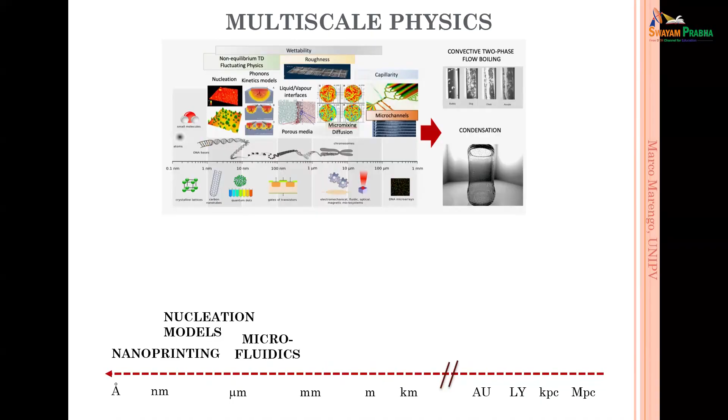Now I'm working with alginate droplets inside the system, as I showed you. Of course, I work with pool and flow boiling. Drop physics, this was my PhD thesis, about droplet impact. I work on icing phenomena, for example, to avoid icing on airplane wings using hydrophobic, super-hydrophobic surfaces.

I'm working on heat pipes, and here we are at the millimeter scale. And before that, microfluidics, between micrometers and millimeters, depending on the system.

But I also work a little bit on building physics, because there was a course in my faculty about building physics. Who is doing this course? Marengo, are you doing it? I don't know anything about buildings. Okay, you can do it. You must do it. Okay, I'll do it.

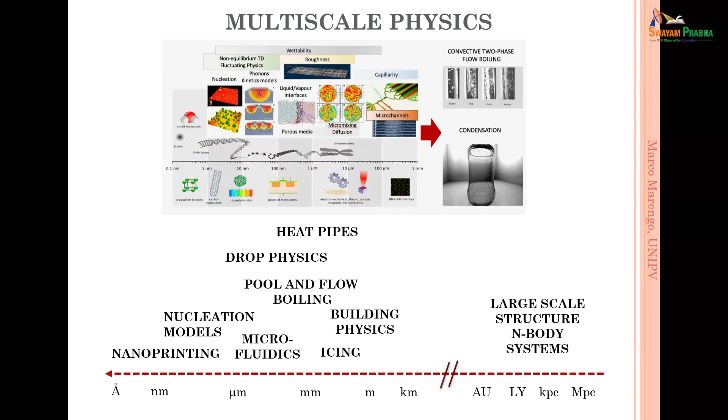And then this is my master's degree thesis, a very big multi-phase flow called the universe. In fact, my master's thesis was about the large-scale structure of the universe, where the particles were the galaxies. So this was my first multi-phase flow in my scientific career.

In fact, I am a cosmologist. So initially I'm a cosmologist, then I changed, but okay. Sometimes I'm asked to deliver a plenary lecture on my career, and I start this way, describing everything I've done over the years, covering really all the scales. This is really amusing.

But what is happening when we are going to do simulations? We need to think not only about length scales, but also about time scales, first of all. When we are dealing with molecular dynamics, we are speaking about from Angstroms to nanometers. With molecular dynamics, we can go up to 100 nanometers maybe, then it's becoming quite challenging in terms of computational time, and we are dealing with picoseconds.

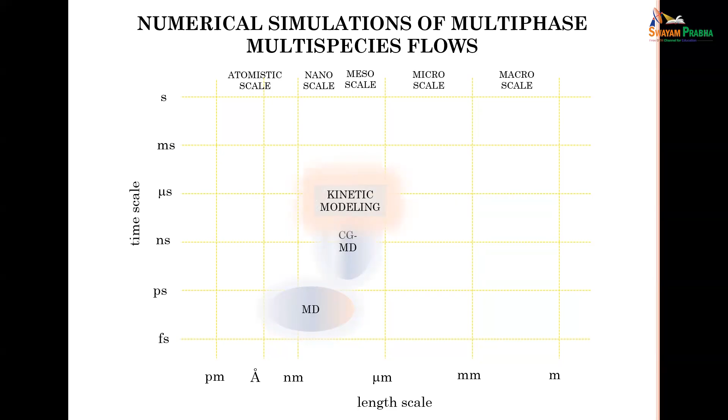Then we have coarse grain MD, where we try to put together a group of molecules. In this case we can go a little bit higher, maybe 200, 300 nanometers, something like that maximum, and we are speaking about nanoseconds. Then we have kinetic modeling, again the same scale, but the time is longer, about a little lower than microseconds.

Then we have the diffuse interface, stochastic hydrodynamics. We are going from nanometers, my simulation has 2 nanometers, 3 nanometers as a limit, up to, I was very optimistic here, let's say 1 micron, stretching the system and waiting a lot of time, then you may do it. And the time scale is about nanoseconds.

Then we have the phase field. Stochastic fluid mechanics is something inside the big realm of the phase field. The phase field is nothing else than solving the Navier-Stokes equation when we consider an interface that is diffused, so we have a finite dimension of the interface. In this case, with phase field, with different degrees of accuracy, we can go from nanometers to millimeters, so it's quite promising.

And then we have VOF, level set method, or hybrid methods that go from micrometer to millimeter. Just now, with PhD students, we are trying to understand the lower limit of VOF. So if instead of a nice droplet of 10 microns, 100 microns, or 1 millimeter, we go down to 0.1 microns, what happens? Is OpenFOAM with VOF able to solve this kind of problem? Which factors do we need to include?

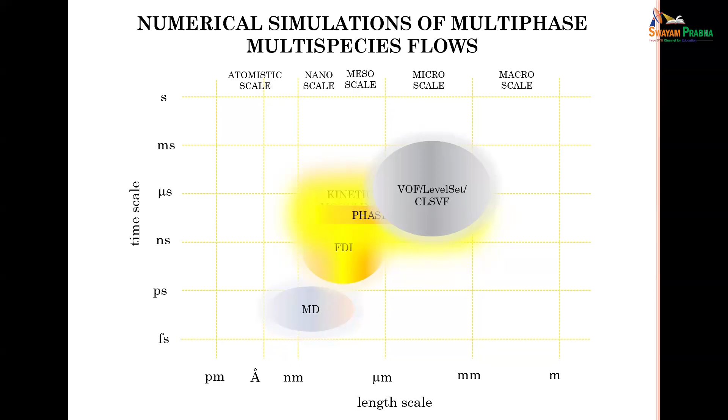For example, we saw that the problem of density is quite important. So if you're going below 1 micron and you're still using VOF with an incompressible code, you may have big problems, okay? This will be a next paper that I'm going to write with my colleagues.

Then we have lattice Boltzmann, a very versatile way to solve many problems at different scales. The main problem with lattice Boltzmann is, for example, that it is not reproducing the sound velocity.

Someone said that it was solved, but I'm not sure because I didn't find the paper where this problem was solved, honestly, so I need to check. And there are problems with the interfaces, the inaccuracy for some phenomena and so on. But it's, of course, very interesting. I'm not a specialist in lattice Boltzmann, I don't know anything, okay? So I don't want to enter because I never touch it. I know about it because I'm receiving papers as an editor, but it's not really what I do.

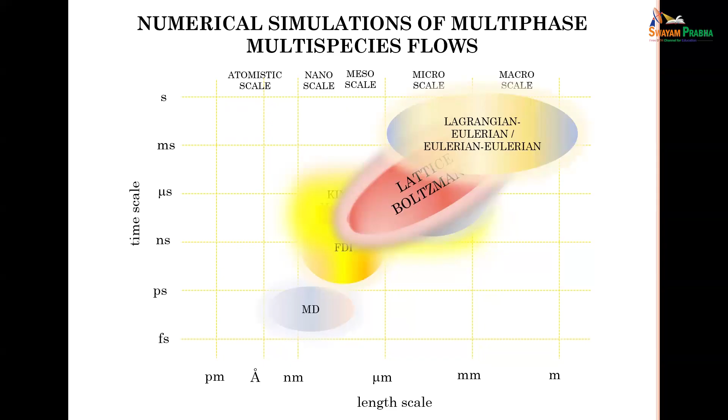And then there is a big point about the Lagrangian or Eulerian simulations that are going even further, even bigger simulations, for example for atmospheric conditions, so we are speaking about kilometers, not only meters. So in fact, what we have are different scales.

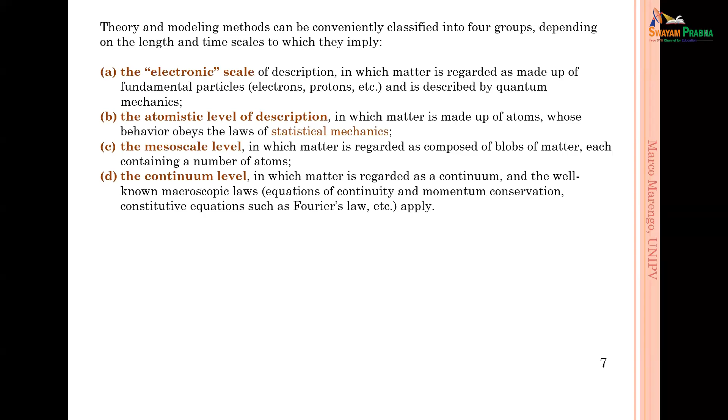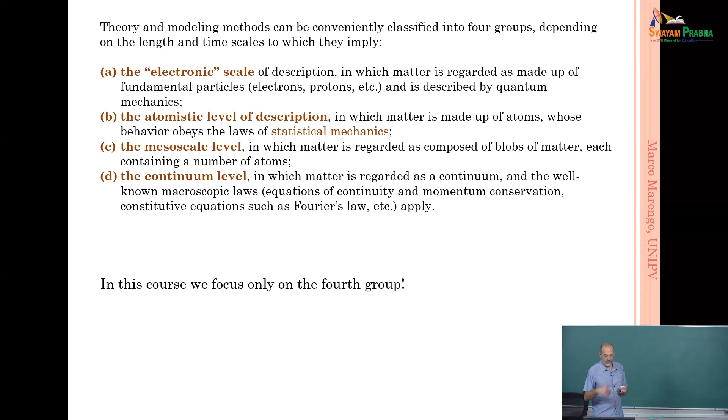One is the electronic scale, even quantum mechanics. Then we have the atomistic scale level to describe the phenomena, statistical mechanics. Then we have the mesoscale level, and finally the continuum level. In this course, we are going to speak only about the continuum level. So I'm not going to speak about mesoscale, statistical physics, or other things.

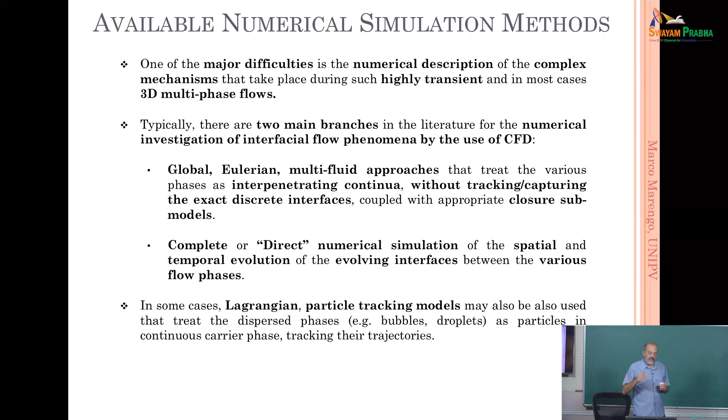The phenomena inside multiphase flows, as we understood after 4 days, are very, very complex. It's one of the most challenging phenomena that you may describe using CFD. So we can distinguish at least two big kinds. On one side there is a global Eulerian multiphase approach, it can be Eulerian-Lagrangian, but it's a way to treat multiphase flows.

The continua, so gas and liquid, gas and particle, are interpenetrating, so they are flowing there inside. And of course, what is important is that we are not tracking the form of the interface, for example the bubble and so on. For us these are particles, okay? We are going to see the equations later on.

But what is important in this case, if we have two components flowing, is the interaction between the two components. So what is very important are the closure equations to describe the coupling between one phase and the other. So it's becoming very tricky, the closure submodels, to know the closure submodels.

And then there is another way, the so-called direct numerical simulation, where we are really looking at the evolution of the interfaces. We are writing the equation in a way that makes it possible to track what is happening in time and space at these interfaces. The Eulerian approach can integrate the Lagrangian aspect, meaning the particles are simulated as a trajectory inside the continuous phase, for example when we have a dispersed phase.

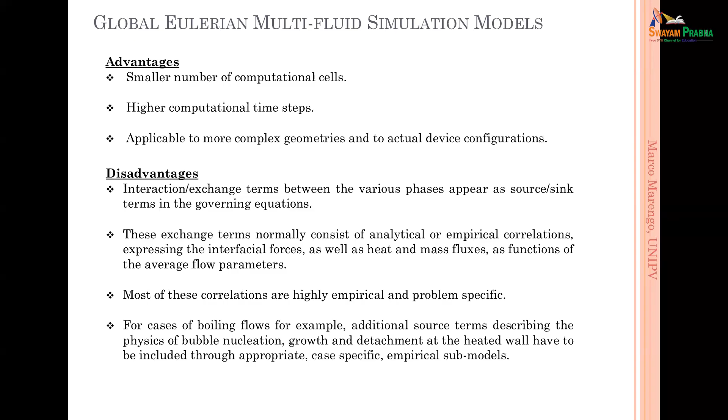About the Eulerian methods, we have advantages. We have a smaller number of computational cells. We have higher computational time steps, so it's easier, and this is very good when we have big scales, large scale industrial problems and so on.

Besides these advantages, it's a little bit difficult to write the interaction exchange terms, as you will see from the equations. It's not easy, sometimes it's very difficult to include all the physics inside. The second point is that you need to use maybe empirical correlations, for example for the interfacial forces, and usually we are dealing with average flow parameters, which becomes quite tricky when we have turbulent flows.

For example, when you have boiling flows, of course we are not looking at the bubble nucleation, we are not going to have a bubble rising because we are not tracking this. So for us it's something like producing the dispersed flow, bubbles, and tracking the bubbles inside the flow, like an interpenetrating continua, but we are not dealing with what is really happening in this way.

It's possible to have a good approximation, but we rely on closure semi-empirical or even empirical equations, for example for H. We are coming back to the convection coefficient, so we don't know what is happening exactly, but we treat the boiling by giving a given value for the transfer coefficient, which considers everything inside. But then we need to rely on empirical correlations for H in the boiling conditions.

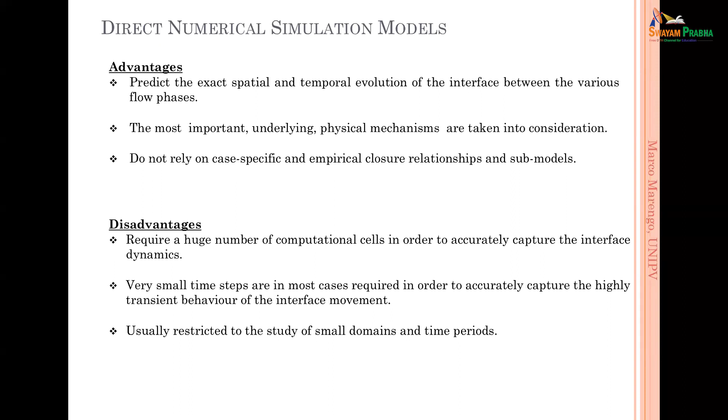However, in most direct numerical simulations, at a given point, for multiphase flows, we need tuning parameters. For example, for boiling with the VOF method, the only thing we can do is say we have a surface, but we are not able to solve the roughness of the surface. The roughness is a scale beyond what we can resolve. So what we can do is patch initial vapor seeds on the surface, and from those seeds we get the boiling. But we cannot simulate how many bubbles we have on the surface and so on. Once we have the bubble seeds, we can simulate the growth of the bubbles, but we still rely on not knowing what happens before that.

This was one of the major reasons why I started to study statistical physics and doing mesoscale simulations.

One big disadvantage is the huge computational power you need, especially if you want to resolve the problem in a very accurate way.

One issue I see as an editor of journals is that many times papers come to me with simulations, for example of boiling, using 50 or 100 micron mesh cells. It doesn't work. But they say, I did a mesh sensitivity analysis and it didn't change. Yes, because it didn't change since you are still very far off.

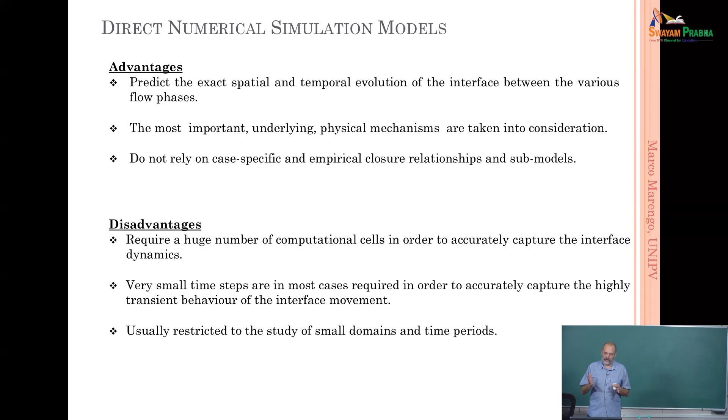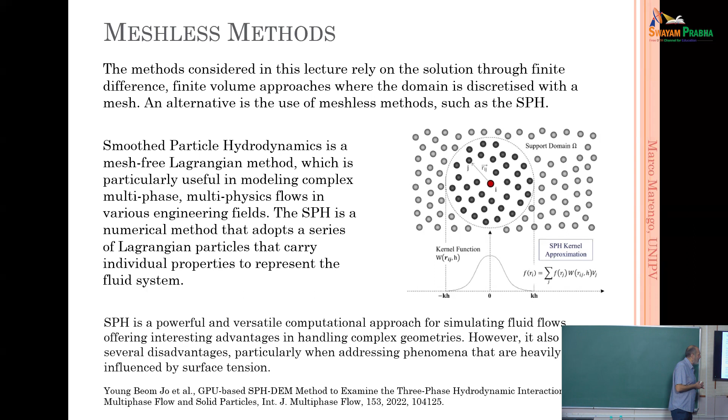It depends. We also have meshless methods, for example SPH, the smoothed particle hydrodynamics, which is in fact a mesh-free Lagrangian method. It's interesting because it can include a lot of physics inside it, so it's quite powerful. There are problems, for example, related to surface tension.

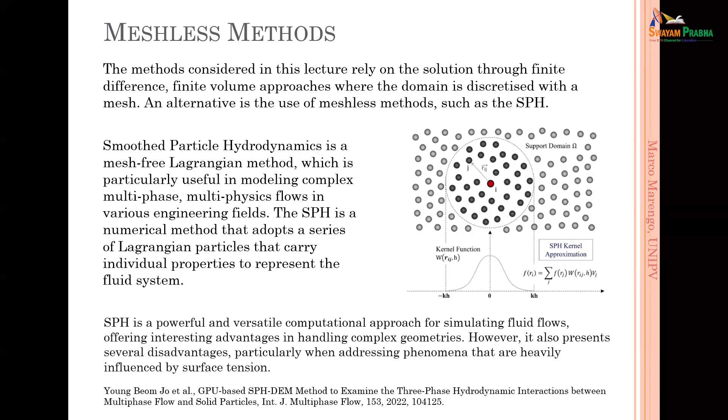But for example, if you have problems like the breaking of a dam, the classical problem of water, a wave, a big wave, this is not too bad. It's also possible to work with SPH. I'm not going to say more about that.

In the last few years, SPH became very interesting because of the GPUs. The way equations are treated in SPH can be really interesting for GPU use, which can accelerate the simulations. It's becoming now interesting. Before, it was okay, interesting, but up to a given point surface tension wasn't there, other phenomena weren't included. Now it's becoming more interesting because with the GPU it's not too bad.

Especially if we have many different components: particles of liquid, solid particles, particles related to gas, particles related to another liquid, for example. Then it becomes interesting, and now with the GPU it's becoming even more interesting.

Again, as I said, there is a problem with surface tension. A colleague of mine is working on that. We have errors, spurious currents, so the interfaces are not well described and so on. But someone is working on it. I think one of the strongest groups is in Munich, Germany. They're working on that, and they are doing something also with surface tension now.

Gas-solid flows: as I said, there is a Eulerian-Eulerian approach and a Eulerian-Lagrangian approach. In the Eulerian approach, both phases are considered as a flow with Eulerian treatment, so we have equations for the liquid, for the gas, and an equation treating the solid particles as a continuum flow, which is possible when we have, for example, a lot of particles.

We have the Eulerian Lagrangian approach, and here we have at least four different kinds of solutions. One is the discrete phase model, DPM, which tracks the particles. Particle-particle interactions are ignored, but the interaction between the continuum phase and the particles is there.

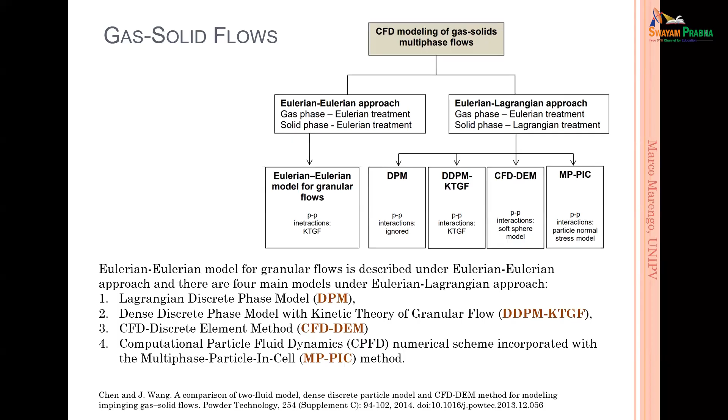Then we may have a dense discrete phase model where we also include particle-particle interaction, so we have collisions of particles, and we can consider hard spheres or soft spheres. So we can have different cases, and we can put elastic and inelastic collisions in the simulation.

We have the so-called discrete element method, DEM, with a soft sphere in this case. It's interesting because we may have heat generation due to the collision. So we have a soft sphere, and we can calculate how much heat is due to the interaction, which is not possible with other methods.

And then we have the multiphase particle in cells, MPPIC, where we are considering in a very accurate way also the viscous interaction. So all these methods are differentiated by how they treat the particle-particle interactions.

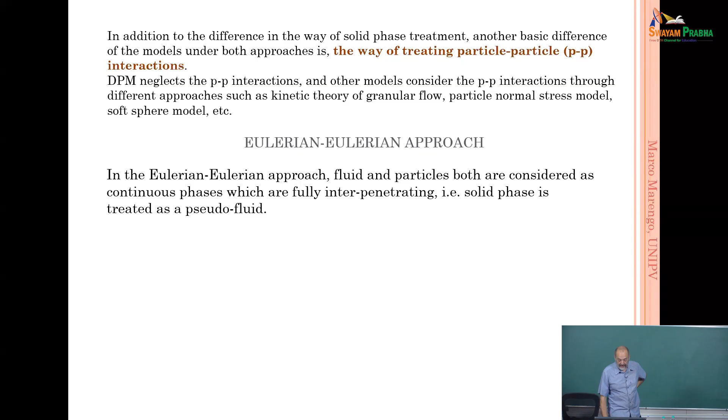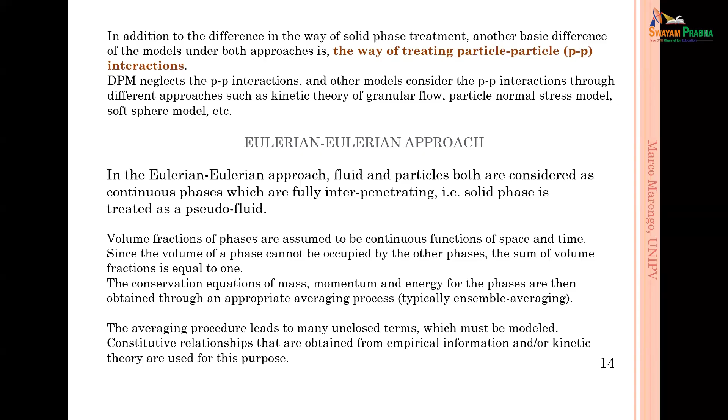So let's start with the Eulerian approach. As I said, in the Eulerian approach the fluid and particles are both considered continuous phases. Here we are using the concept from when I spoke about multiphase flows, number one. So we are speaking about volume fractions, and tracking the values of the volume fraction is really the key point.

So we know how much is the volume fraction of particles inside the total volume, and these values are changing in time and space during the simulation. Of course, the sum of the volume fractions must be 1, as we have already seen. And we need to write the conservation equation.

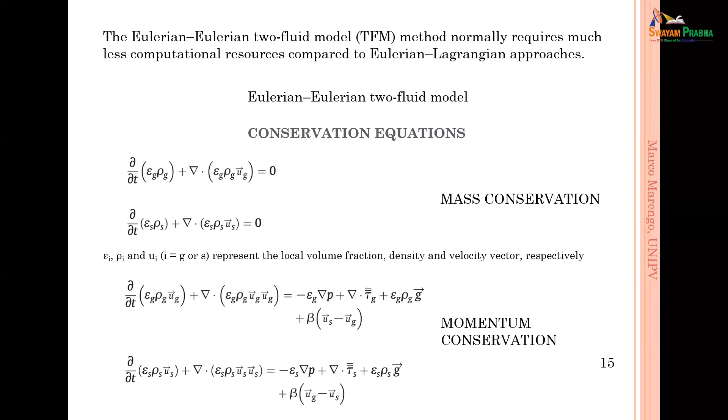For example, these are for the Euler two-fluid model. We have the conservation equations, and you can see they are completely separated, as I said. You can recognize what we have demonstrated in lesson 2.1 about the modeling of the Navier-Stokes equations, the conservation methods.

And we can write this term here. This is the mass conservation, and this is the momentum conservation. Momentum conservation is quite classical, however classical only until a given point, because, for example, we have this beta times US minus UG term.

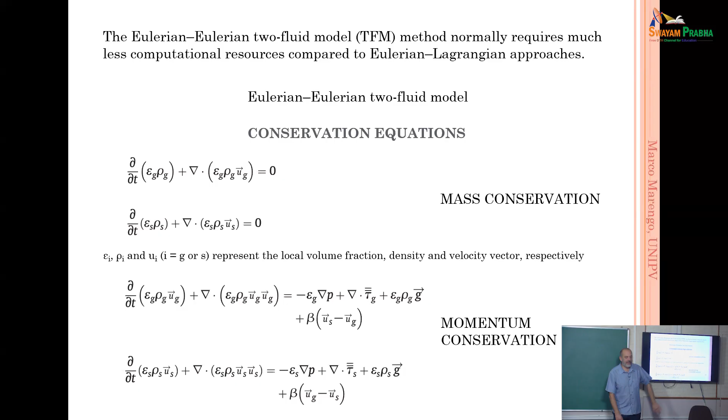So this is becoming not completely separated, because we don't have the subscript G all over - there is now a connection between particles and the liquid or the gas. The same here: the two equations apparently are the classical Navier-Stokes equations, but now we have another term that is already a first link between the two phases.

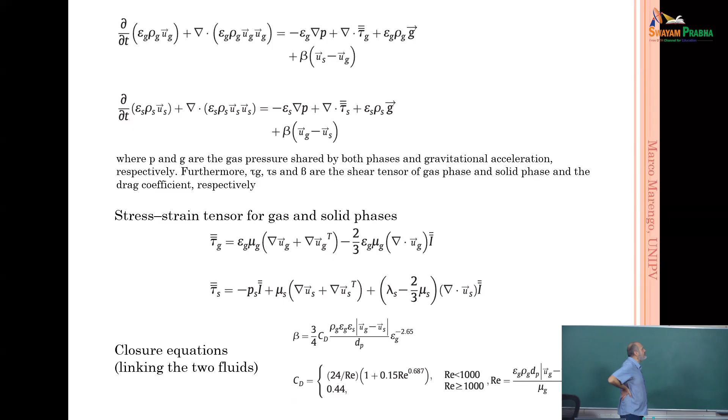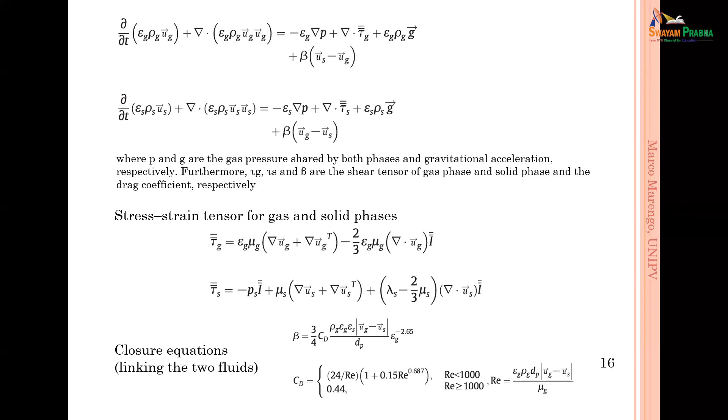So one of the points is that tau G and tau S can be written again in this way, and the problem is this beta - sorry, this is the closure equation for the beta. The closure equation means the link between the solid particles and the fluid, the continuum phase, and it can be written in this way. It's linked to the drag coefficient of the solid particles that are going to be dragged away, or dragged with the flow.

And these are the terms that we have for the gas and for the solid, and we can admit the fact that we may even have a compressible situation. This is interesting - look, the compressible term is in the solid.

This is interesting to point out, because imagine having a fluidized bed with a lot of solid particles, and we are considering the solid as a fluid. Well, it's really possible that the density is changing - we have agglomeration, and agglomeration for the solid means a change in the density. So it seems strange to say, but the fluid, gas and liquid, is incompressible, while the solid is compressible, which is a little bit weird.

What, the solid? No - the fluid is incompressible, no problem, we can deal with this. The solid is compressible because we have agglomeration - the particles can stick together, so in a given volume you have more particles, and so you are changing the density.

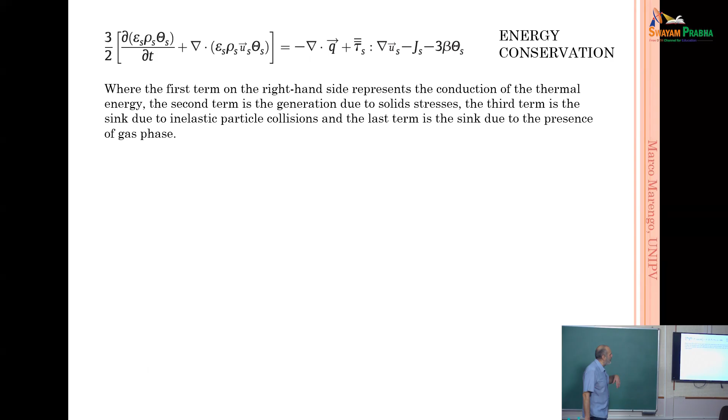And then we have the energy conservation equation, and this is also for the solid part, so we can have something similar also for the other one.

Another point that we need to simulate is the pressure of the particles. We said that it's a flow, imagine having all these solid particles. If continuous, then there is a pressure associated to the continuous, like the fluid, like water, liquid water or gas. So we can write the pressure in different ways, but this is a possible way. It's linked to the temperature, for example. So we can construct an equation that is saying how much the pressure of the solid is linked to the temperature of the system.

We can even write the viscosity of the solid. This is one way, because here we are entering the research domain. So we can have different kinds of equations in order to describe what is happening for the different particles. For example, if the particles are solid spheres, it's something, but someone might add, oh, it's not spherical, it's a polymeric, ellipsoidal particle. Then you need to change a little bit. So we are entering research, and there are really very sophisticated models for the different cases. There's even the thermal conductivity of the solid flow. So you need to write expressions, and this is again only an example. I took an example from a paper, how to write pressure, viscosity, and thermal conductivity of the particles.

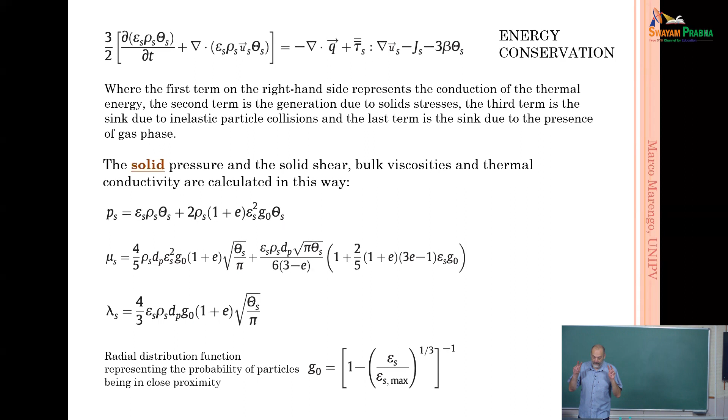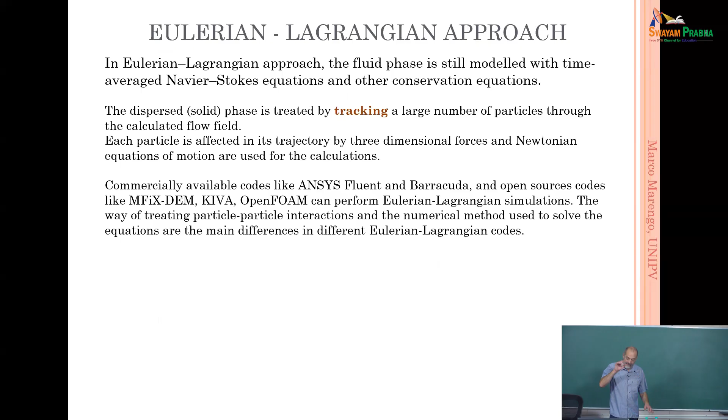Then we have the Lagrangian approach. We have a lot of commercially available codes, in ANSYS, OpenFOAM, and so on. What is important here is that we are going to have continuum flow plus the disperse flow, which we track using Newton's laws of mechanics. So we're going to have equations linking the mass of the particle, acceleration of the particle, d2x/dt2, equal to the sum of forces acting on the particles. In this case the particles go around, and the trajectory of the particles is inside the simulation.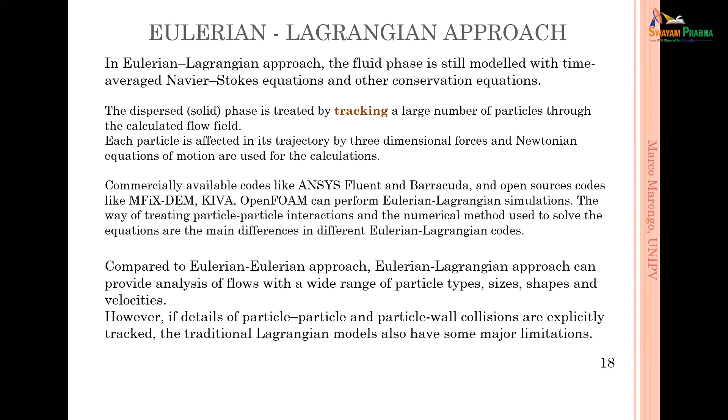What is interesting is that with this kind of solution, it's not too bad if we have something other than a sphere, because the other approach relies on writing the right equation for the thermal conductivity, viscosity, pressure, which is a mess. Here we have a particle that is going around. It's not too bad, for example, even if there is a different shape, this is okay. It's not a problem at all in this sense.

We can even have angular momentum of the particles. We can include it, because it's a question of balance of forces. So we can have also the conservation of angular momentum of the particles. So we can have cylinders, particles as cylinders that are rotating in space. It's possible. And for example, for a spray, we can use this kind of simulation, because the spray is producing a disperse phase, a lot of drops going away.

One of the problems, of course, is that a Eulerian-Lagrangian simulation can be really overwhelming if we have a lot of particles, because we are following each particle, so it's becoming really crazy. So what can we do? We can have a coarse-grained Eulerian-Lagrangian simulation. What does it mean? Instead of following each particle, which can be overwhelming, we build up parcels. Parcels are groups of particles together.

So, for example, in the case of a spray, we can put together particles with a given dimension, because the spray produces a distribution of droplets. We can group them together in small packets and see what's happening. This is interesting, because even if we have a lot of particles, we can follow not the particles but the parcels. Someone calls them digital particles, because they are digital representations. They're not actual particles, it's a set of particles.

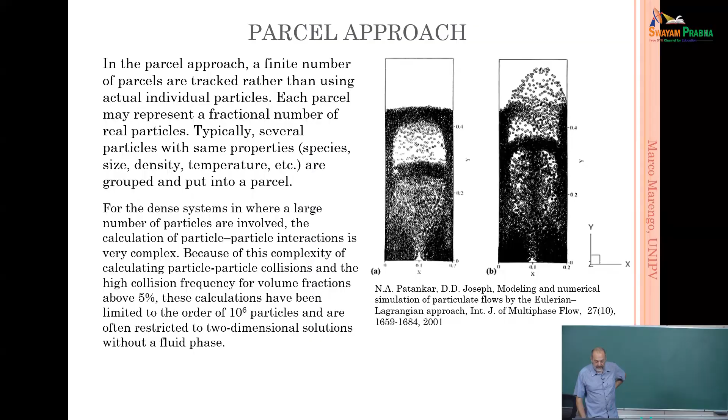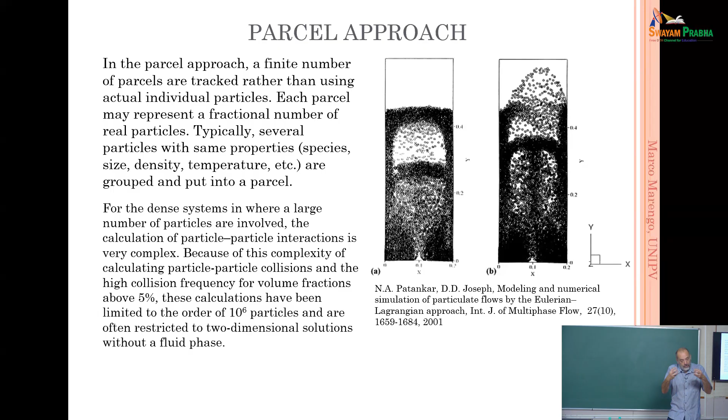One of the problems, of course, is the collision models. For example, in this case with parcels, same for sprays, a parcel of droplets is going along and another parcel of droplets is coming, and we get a new parcel, or maybe two parcels, but with different properties because of coalescence of droplets or breakup of droplets. So the parcel itself can change due to collisions. This is, of course, a problem because again we need closure models to understand how to deal with the variation of properties inside the parcels.

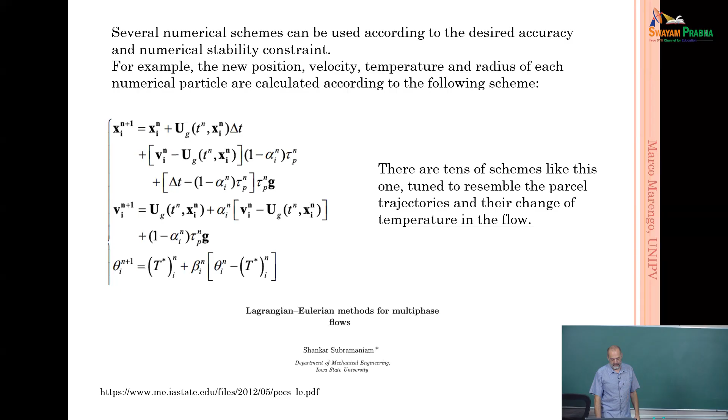How is it possible to write the equations? Well, it's too long to cover here, but we write the classical equation where we have the position of the particle linked to the velocity of the fluid and the forces acting on the particle. I'm not entering into detail, there is a lot of literature on that.

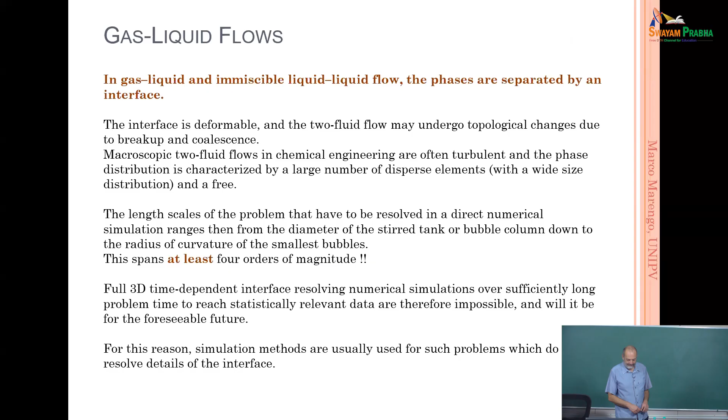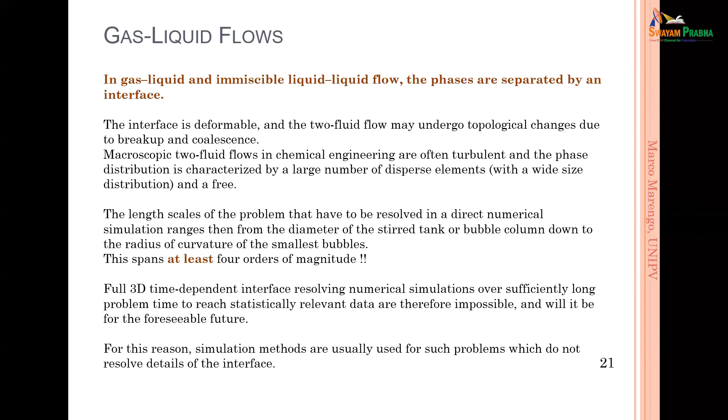Then gas-liquid flow. This is very complex because we have surface tension. Every time we have a liquid, we may have the problem of surface tension. If we have a pipe full of oil flowing, there's no problem with surface tension, and a flat surface is also not a problem. However, every time we have the presence of something else, like gas, we have a free interface somewhere - a bubble, wavy film, and so on - surface tension plays a role and we need to consider it. We can't say we can neglect it.

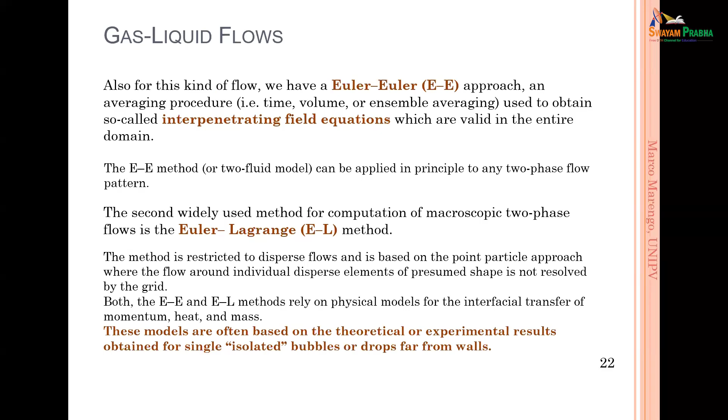Also for gas-liquid flow, we may have Euler-Euler and Euler-Lagrangian simulations. Again, the point is that we need the right closure models. Another point is that solving the problem of gas-liquid flows is quite complex because there are a lot of possible scales.

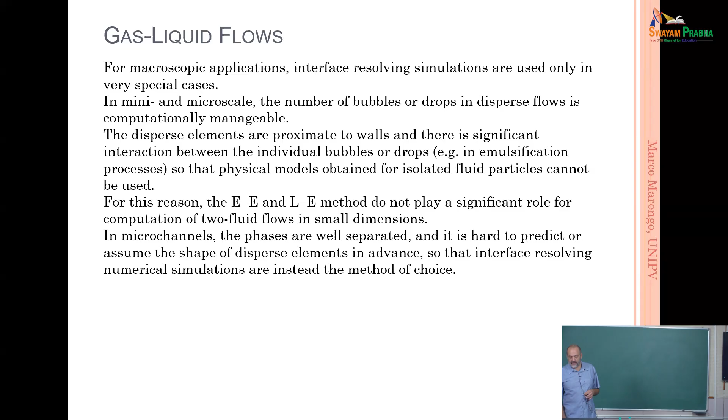In small dimensions, we can go for direct numerical simulation. In big dimensions, for example heat exchangers, we need to rely on Euler and Euler-Lagrangian methods, otherwise it's too big. But for example, in microchannels, the phases are very well separated, so we can work on that and do the simulations. At the end, I like this picture from a paper by Martin Wörner.

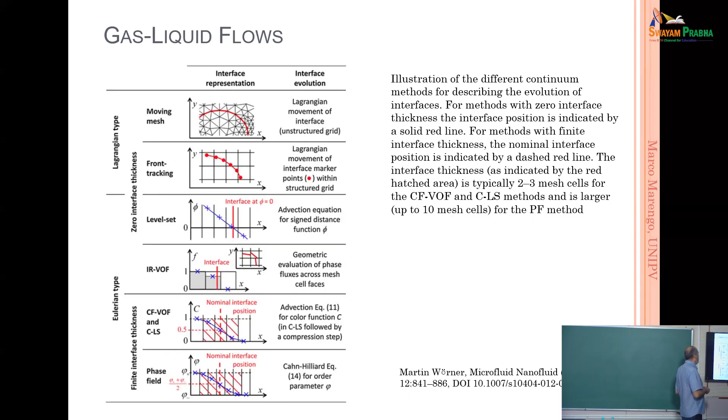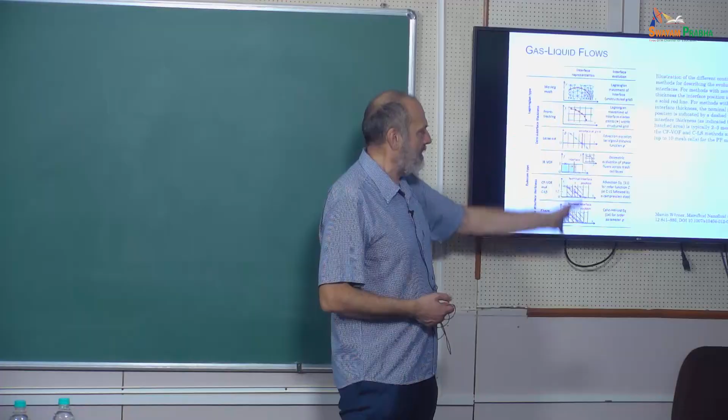We have the Lagrangian type and the Eulerian type. What's important in this case is to understand how to deal with the interface. The interface is the devil - the way we deal with the interface becomes the key point. So there are different ways.

First of all, we have two big distinctions. One is about zero interface thickness, so the interface has no thickness - it's really like a mathematical interface. The other is when we accept the fact that we have a finite dimension of the interface, for example in phase field methods.

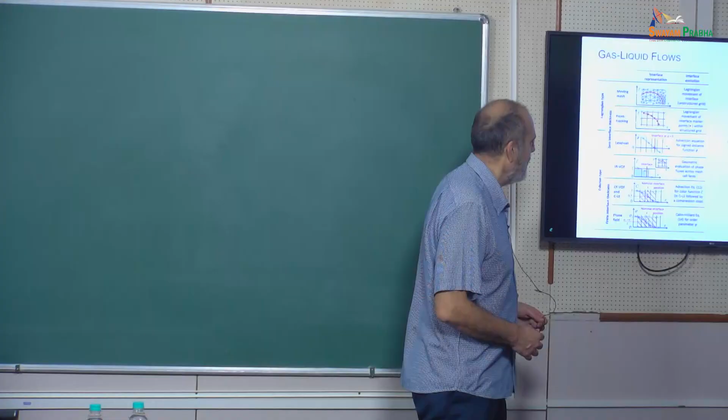Or there are different forms of VOF, for example, if you allow VOF to have a given interface thickness, we can play with this, especially if we have VOF simulation very close to the critical point - this can be a problem - or we're dealing with VOF with compressible codes. In this case, we need to understand how thick the interface is. Otherwise, with zero interface thickness, we have different ways to explore the simulations.

This is the moving mesh, where we move the mesh with the interface. We have front tracking, level set methods, and VOF, where we have a very sharp interface.

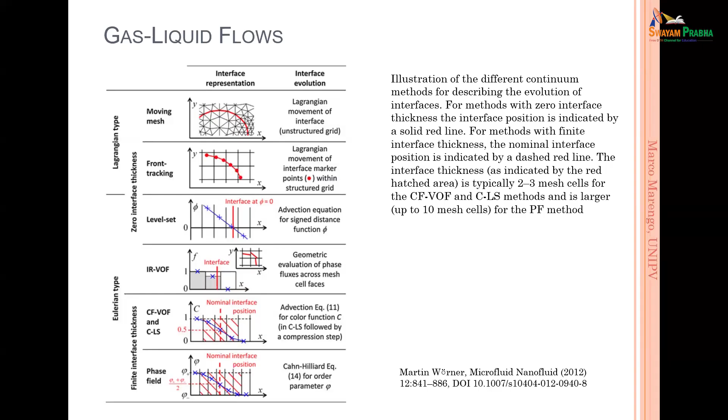Of course, all these situations may have problems, for example with VOF. If we are doing a very sharp interface, we may run into the problem of losing mass - it's a very classical problem in VOF. So we need to tune things and have the right shape of the interface in order to avoid problems like that. Nowadays, we are really able to have a very good VOF, and also level set.

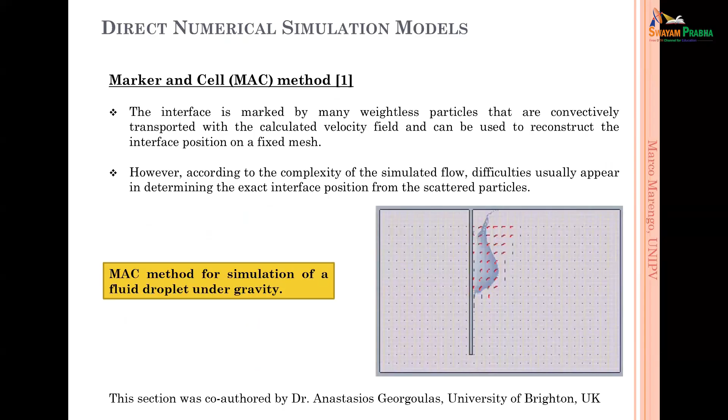Now, I don't have time to explore all the different ways. This was a very old way used years ago, marker and cell, where at the beginning we mark points on the interface of the droplet, and we follow where they're going - we track these points. This is the reason it's called marker and cell.

So we write equations where we have a kind of transport - it's something like solid particles on a droplet at regular points, and we follow the solid particles. It's not really solid, it's a mathematical point, but we follow them. So the bubble, or the droplet, changes form because we have the relationship related to the trajectory of these particles.

Then we have all the methods linked to front tracking, like the Lagrangian frame. This is done using a mesh that changes form, a mesh that follows the interface. In other cases, the mesh is fixed, or we can have mesh refinement. There are numerical techniques to improve accuracy close to the interface, but in this case, the mesh itself is moving, so the concept is a little bit different.

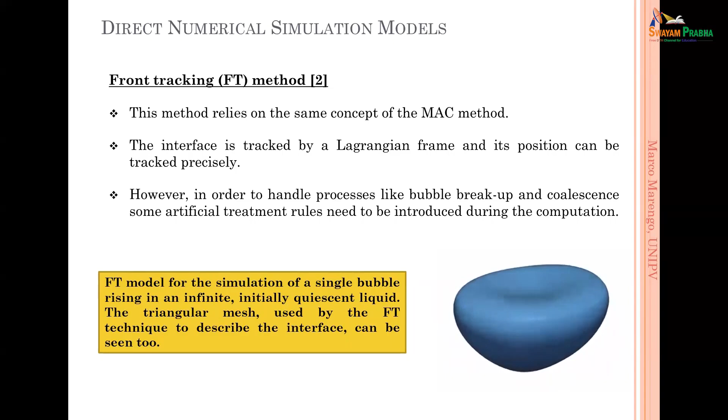It's very accurate in terms of surface tension. For example, if you want to understand the variation of the form of a droplet when putting a sessile drop for different contact angles, there is a code called the Surface Evolver. Surface Evolver does this by only looking at the interface, okay, and there is not so much physics inside.

But one of the problems when using level set, VOF, these kind of methods, is getting the right value of the capillary pressure. It seems stupid because it's sigma divided by... 2 sigma divided by R, no? I always need to think, is it sigma divided by 2R, or 2 sigma multiplied by 1 over R, 2 sigma divided by R.

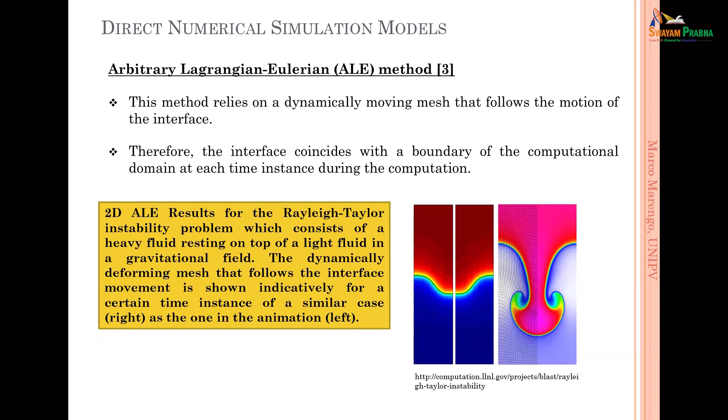Yes, so we know the capillary pressure, right? Well, if you're using VOF and level set, you are close, but not exactly. With these front tracking methods, you are exactly there. Then we have arbitrary Lagrangian-Eulerian methods, don't have time for that. And then we have volume of fluid. We are going to see volume of fluid a lot in the second part, it's kind of my specialty, so this is the reason why I put a little bit more. I have also videos on that, so it's interesting.

The VOF. These are simulations with the VOF. I think everybody saw that. At the moment, I believe the VOF is the most popular interface capturing approach.

Okay, level set is pretty much used also. They are somehow similar, let's say, but of course different techniques, though similar. We are going to speak about that later. This is the level set. The big difference is really the form of the equation, how we track the interface.

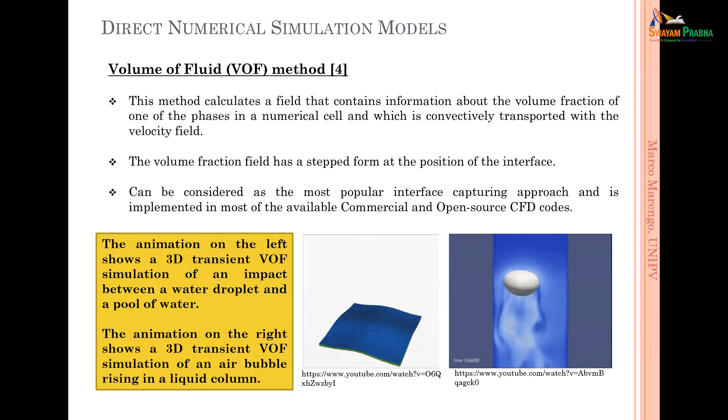In the case of the volume of fluid, you are going to see the equation. We have a color function that is a volume fraction, and we have an equation for the volume fraction. In the case of the level set, it's not really a volume fraction, but a kind of distance function.

So we are going to have a change from one phase to another. We have a given form of the density, for example. Imagine having the density, and we check where the steepest gradient of the density is. So we find where, in this distance function, the points in the domain where the distance function equals 0 are, meaning we are at the position of the interface. And we can say this is the position of the interface.

And these are, again, animations of the level set. And let's say, also this method is quite used and so on.

This is on the right. We have even film boiling phenomena, for example, because in both methods, of course, we can include the energy equation, so we can consider heat transfer and so on, boiling.

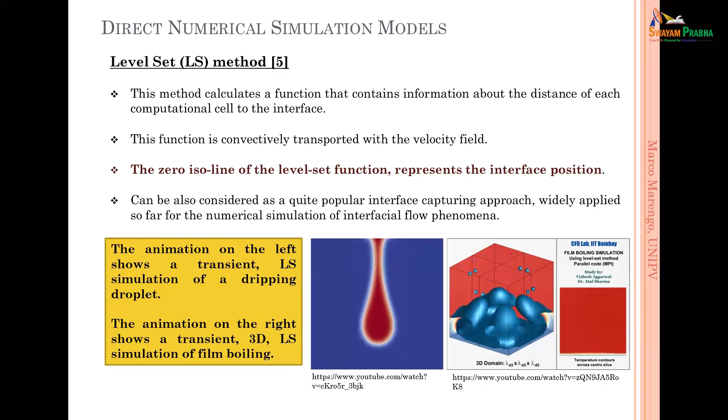We can even combine them. The VOF is mass conservative when we allow the value of alpha to be free. But then, if we like to define the interface, in the way we define it, we are changing the mass. So inherently, the VOF is mass conservative, and the interface is diffusive. However, in practice, since we would like to see a nice interface, we use methods to reconstruct the interface in VOF, and then we are losing mass.

In the level set, inherently, originally, it's not mass conservative, but it's very good for tracking the interface, so a very sharp interface. Because the interface in level set is a mathematical point, where the distance function equals 0. So this means we have a nice interface, okay, but we are losing mass. So both systems, at the end, go in different directions, but they both have a problem with mass a little bit. So if you put them together, we may have nice simulations.

And for example, this is a simulation of the splash.

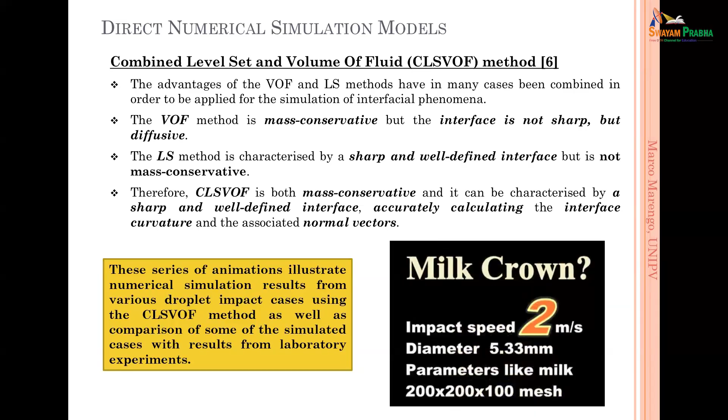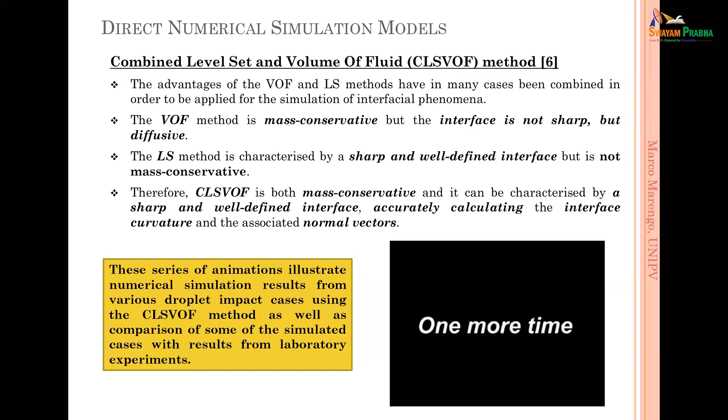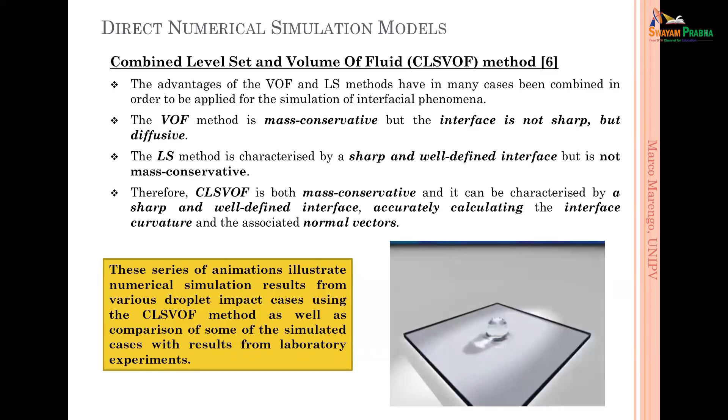Yeah, okay, this is coming. And the simulation is not bad. This is for the milk with different parameters and so on. Honestly, this is a very good simulation because it's possible to see even the perturbation on the lamella. Not bad, there are different cases.

What is important to say with these methods is that, for example, when you have one droplet colliding against another droplet, we have drop collision. Sometimes we have the bouncing of the two droplets, so the two droplets are arriving, but they are not going to coalesce.

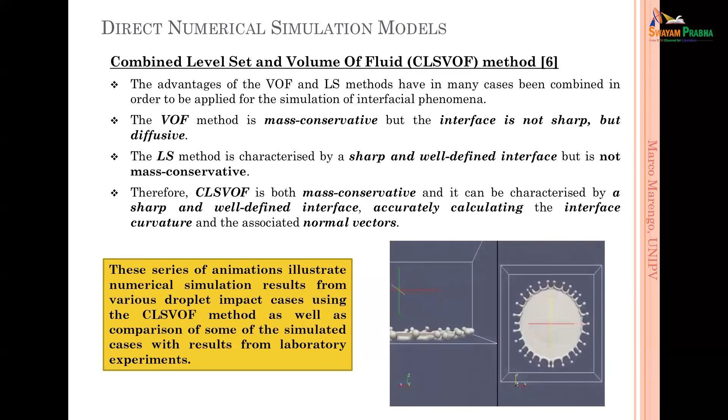Where with the VOF level set is quite difficult. Why? Because what is that? Ah yes, it's still the video is going. You are distracted by the video. Because I was looking, nobody was looking at me. What's happening?

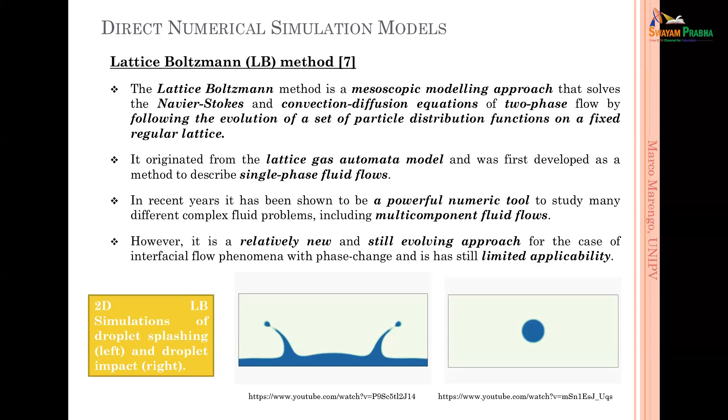So what do I want to say? Pay attention, one of the problems is numerical coalescence or numerical breakup. So if you have, for example, in the splash, if the lamella in the crown is going to be very, very thin, you are going to have a breakup that is not the real breakup. In reality it's not happening, but it's happening because we have a liquid film below a given thickness, for example 2 mesh sizes, 2 cells, and then of course we have a breakup, but it's not real. It's numerical, meaning we did something wrong with the dimension of the cells.

Same thing, even trickier, is when we have a droplet impact with rebound. Because when the droplets are arriving together, of course there is one point where we have liquid from one side and the other, and so then we have coalescence for the numerical work. But in fact it's not, because we have the presence of air between the two droplets that avoids the coalescence of the droplets, and so the droplets are colliding and going away. It's possible to see it.

This is difficult in VOF because you need a very, very small scale in order to understand what is happening to the gas air, and the phenomenon involves a gas that is compressible. So the only way to simulate correctly this phenomenon, droplet-droplet impact, which seems simple but in fact is not, is really to have a simulation with compressible gas and a very, very thin mesh, because we need to understand what is happening between the two liquid interfaces.

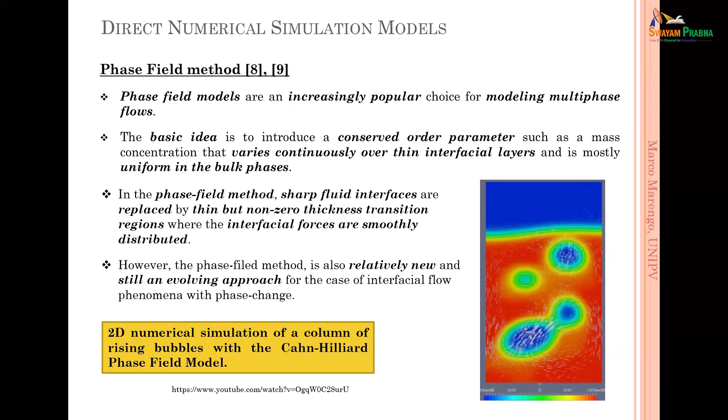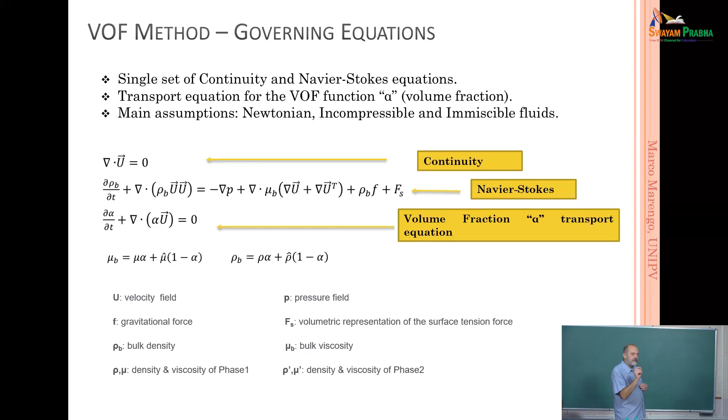We need to put it in a way that the force in the Navier-Stokes equation is switched on only where we need it, in the few cells in the domain where the change happens. What we look at is the gradient of alpha. The surface tension is a parameter, but in this equation, if we'd like to switch on this term, we use the gradient of alpha, the volume fraction, which decides where we switch this term on and off.

So what we can write is that the force is the surface tension multiplied by K, the curvature, multiplied by the gradient of alpha. This means that over the bulk it's zero; only where we have a gradient do we have surface tension. It's also possible to write the curvature as the divergence of the gradient of alpha, which is interesting because we already have the curvature together.

The point is that at the end what we land on is that we have zero where there's one component, for example gas, and where we have one is the pure liquid. In between there's a value. This value doesn't mean that in these points we have liquid and gas, it's not the quality, it's not the vapor quality.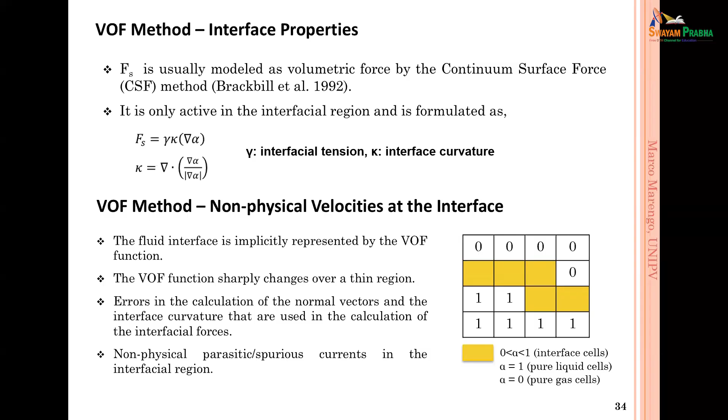Forget that idea. It's only that numerically we know that inside these yellow cells we have the interface, because there is the variation of alpha, the volume fraction. Nothing to do with the vapor quality. So we know that something is happening there. We can live with this, we can say it's fine, we can have these points with a given value of the volume fraction.

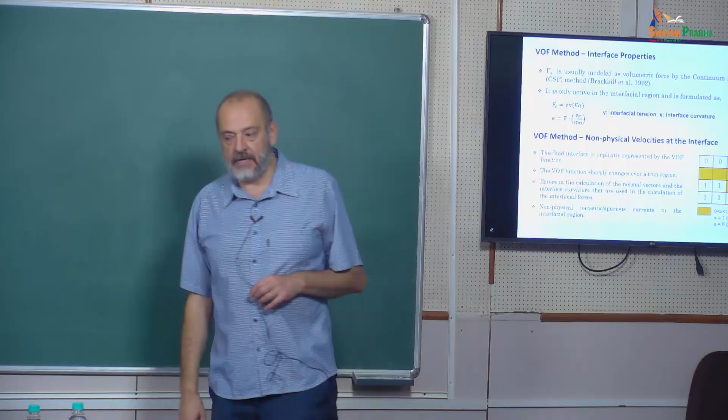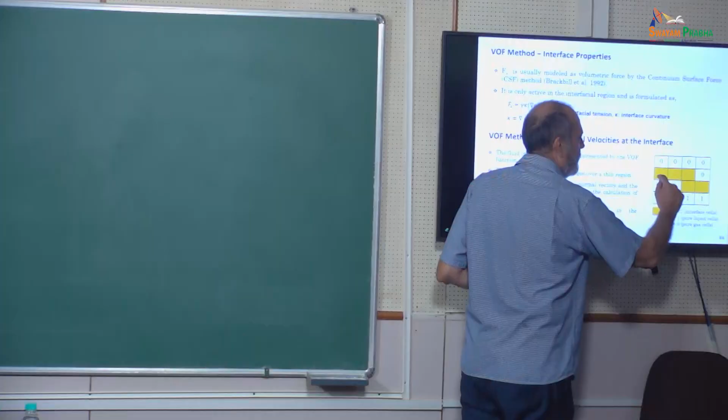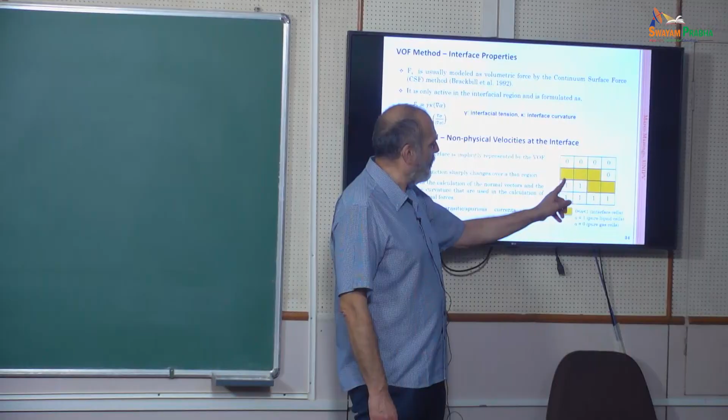It's not a problem. However, sometimes we would like to have a reconstruction. Here it's very clear, we may have something like that, but again it could be something like this or something like this. We don't know exactly because it depends on the values of alpha that we have inside. For example, here can be 0.1, 0.9, 0.7. 0.1 and 0.9 means there's a big difference inside these cells.

So we need to reconstruct the form following the values of alpha. This method is quite important, for example in order to avoid so-called spurious currents, velocities that are artificially generated at the interface by the effect of this kind of assumption.

In OpenFOAM, for example, we have different ways to solve the VOF, with interFoam or with interface sharpening. I think these are possible ways. And in level set, if you see the equation, it's similar. So we have a level set function.

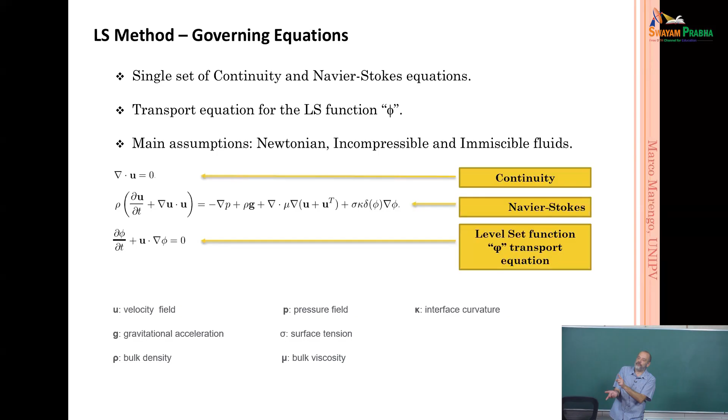Why is the level set inherently very good in terms of sharp interfaces? Because, as I said before, VOF is very good in mass conservation but a little worse in terms of surface reconstruction, because the interface is diffuse, but we can reconstruct it, so we come back to the mass problem.

Here, why? You can see that here we have directly this equation, so the surface tension force is really written in an explicit way. In this sense, inherently, level set is better for the interface and worse for mass diffusion. At the end they are very similar, because with VOF, after reconstruction, it also becomes somewhat worse, coming back to the classical mass diffusion.

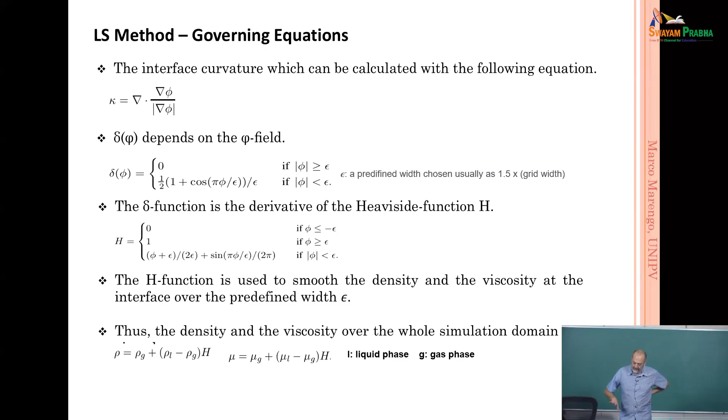And so we can write the different forms of the interface curvature and so on. Again, I don't have time to go into the details here, I'll leave these slides for you. And so...